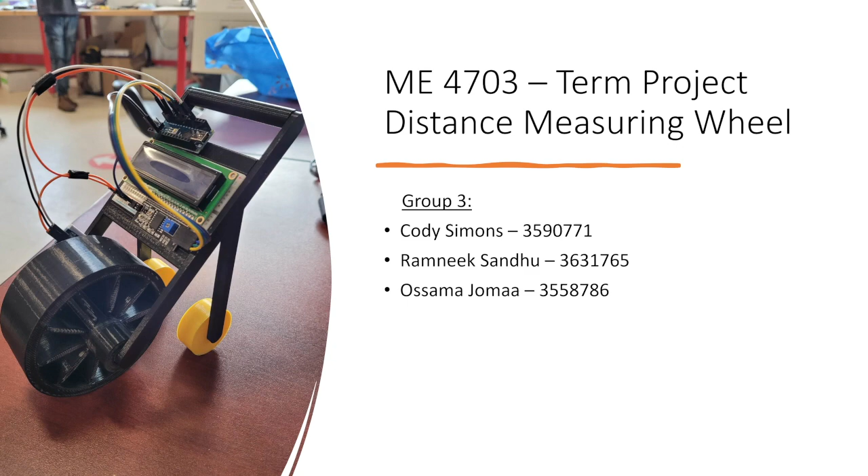Our agenda for this presentation will go as follows. First, I'm going to start off with the introduction, different iterations of the design, and briefly talk about our final design. Then Ramneek will continue on going more in depth on our final design, talking about the components involved and the circuit diagram. Finally, Cody will talk about our testing procedure, results and analysis of our design.

The main objective was to ensure that this handheld instrumentation is able to measure longer distances unlike a ruler stick, and also has the capability to measure curved surfaces unlike a measuring tape.

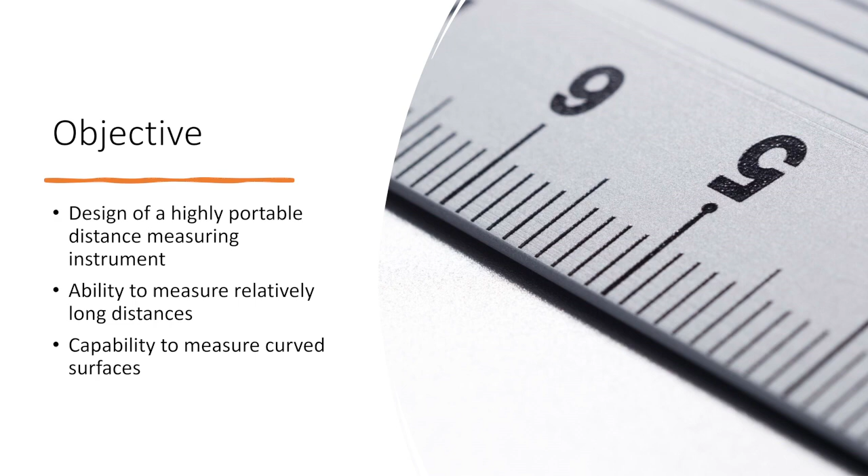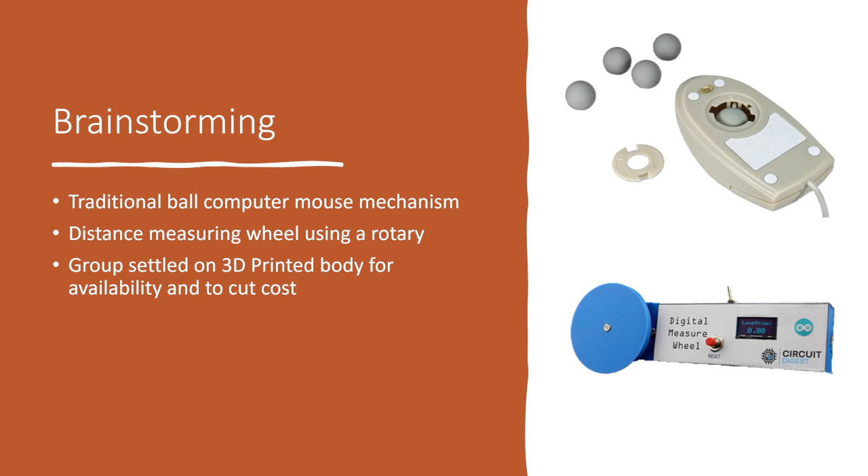The group brainstormed many ideas, like using a traditional ball computer mouse mechanism, but to read distance instead of moving a cursor on a computer screen. Another idea was a distance measuring wheel using a rotary encoder, as can be seen in the picture slide. The group finally settled to 3D print the body and use an external sensing device to cut cost, and simply because it was what was most easily available.

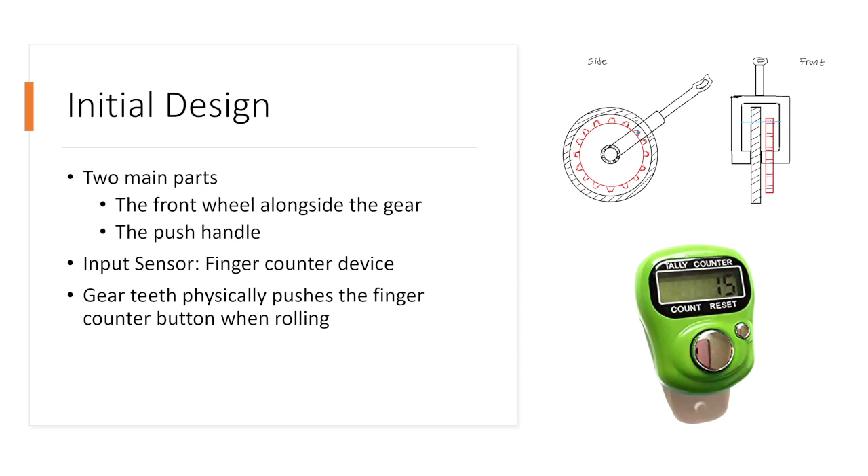The basic concept of our initial design is a rotating wheel attached to a gear with a push handle. The gear teeth are meant to push on a finger counter device to track count of every gear tooth pass. The more the teeth, the more accurate the reading would be. So the group had to figure out a happy balance between increasing the number of teeth while giving clearance for the input button to be released after being pressed.

For our initial design, the group 3D printed the blue wheel as a first draft prototype. Several quality of life tweaks have been added to the second design, like an extra front wheel for better system stability, and two rear wheels to make sure the sensor attached to the push handle stays in position relative to the rotating wheel for a more accurate reading. Finally, a cage was added to the top to house the finger counter reader.

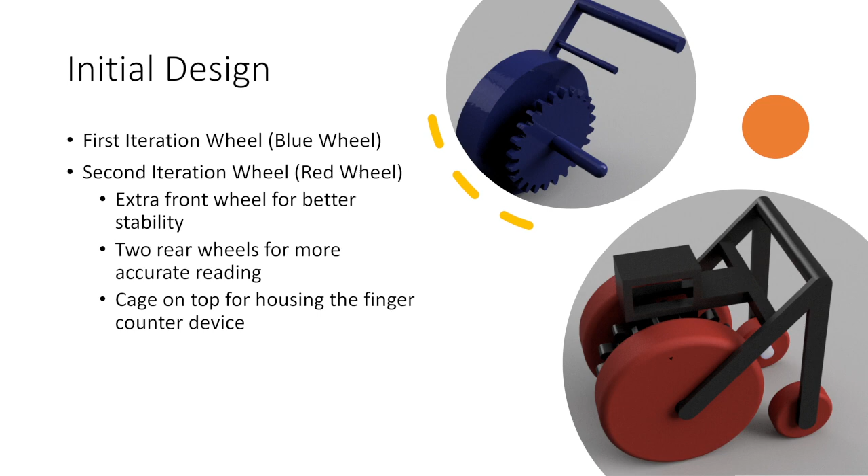For our final design, the group had to change the sensor input from finger counter reader to an IR sensor due to supply chain issues. This ended up working better for us since it gave us more control over the system code. For example, we can now have different length unit readings. The way this works is the IR transmitter emits a beam of IR radiation which travels through the air until it hits an object. In this case, it would be the fins in the newly designed wheel.

Also, for the final design, the gear and the finger counter cage has been naturally eliminated, as can be seen on screen.

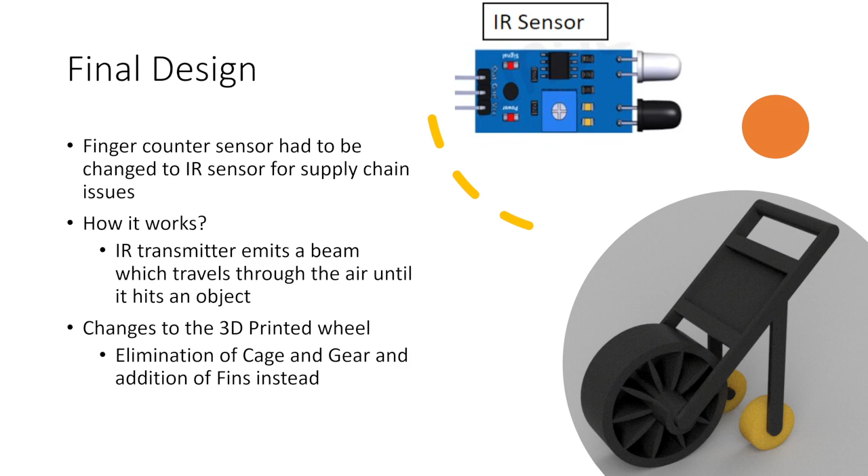Let's now discuss the working principles of our final design. The design is developed using an IR obstacle detection sensor. It converts number of turns into linear distance traveled by the wheel. The sensor's IR transmitter emits a transmitted IR beam and upon detecting an object or obstruction, reflects the beam back to the IR receiver. In our design, the IR sensor detects the various fins of the wheel. The code counts the number of fins that have passed the sensor and converts it into linear length. The linear distance L is the number of fins N times the arc length l. The total length is calculated and displayed for the user.

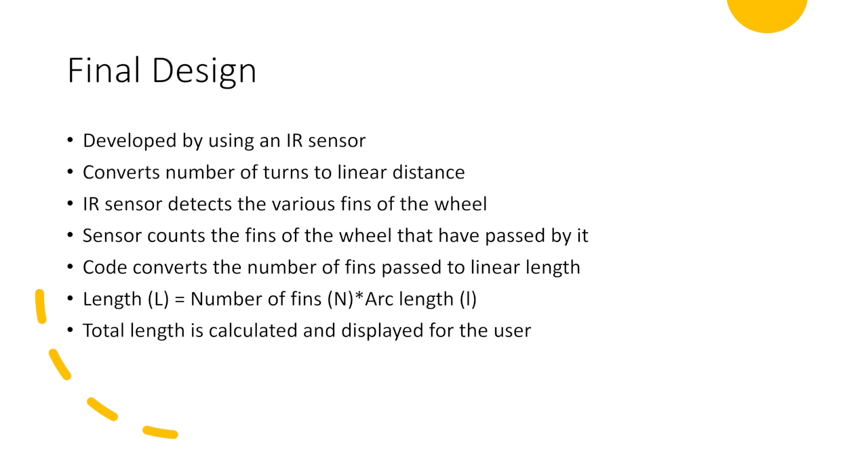The design consists of the following components: a rotating wheel, an IR sensor module, an Arduino Nano microcontroller, a 16 by 2 LCD display, an I2C 1602 serial LCD module, a breadboard, and jumper wires.

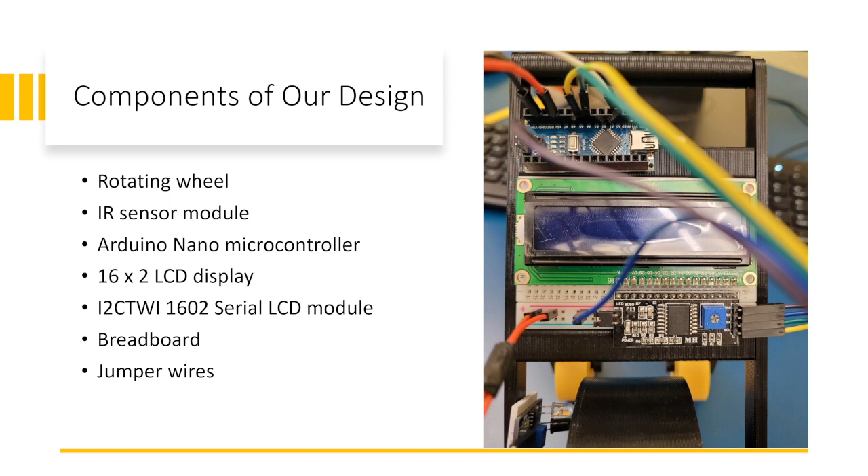The following schematic depicts the circuit diagram for our distance wheel. The wires in green are the grounded connections, and the ones in red are the power supply for the sensor, display units, and the Arduino. As a fin passes the IR sensor bulbs, the microcontroller counts it as a unit input and multiplies the arc length between the two fins to display a linear distance value.

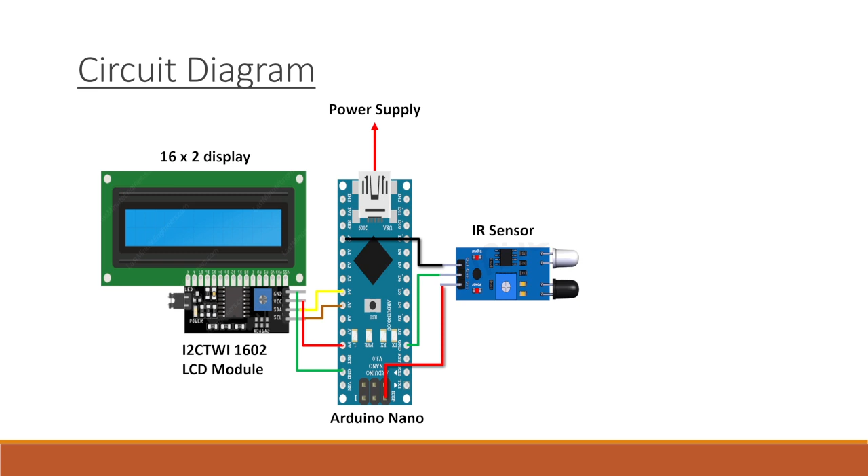The final prototype of our design is as shown. It consists of a handlebar for the user to grab the measuring wheel. The sensor is placed between the fins, and as the user rolls the wheel, the distance traveled is displayed on the LCD screen. Currently, the Arduino requires a cable connection to a power bank or a computer. In future iterations, the design could be hooked with a 9-volt battery supply to make the wheel cordless.

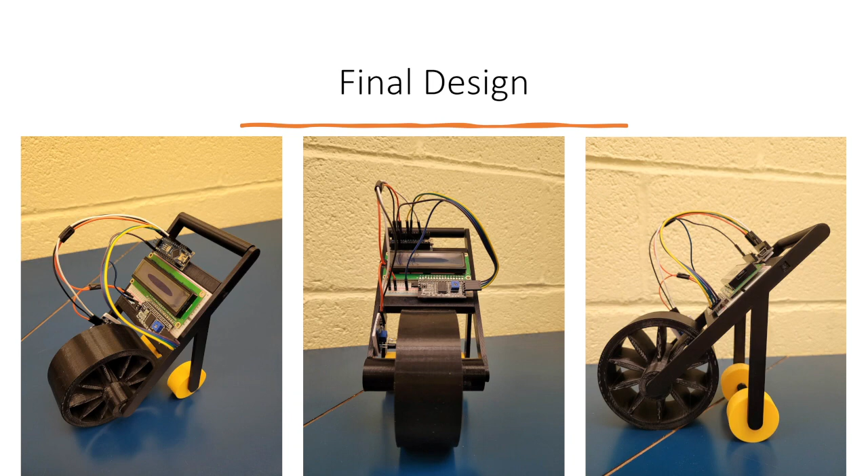Now I will discuss the testing procedure done in order to yield the results obtained from our IR sensor prototype.

For the testing procedure, we decided to measure 3 table surfaces in the library: a table in the fabrication lab, a small side table, and a square table in room 105.

Each dimension of each table was measured beforehand using a tape measure, where the length and width were measured 4 times each and then averaged. This gave us an insight as to what each dimension would be when measured with our sensor prototype.

When using our distance measuring prototype, a line marker was established between 2 of the fins so that the IR sensor passed through the first fin as it was counted. This acted as a reference position where the prototype started each time it measured a table dimension, always positioned so the point was in perpendicular contact with the surface.

When measuring each table, there were 2 trial tests performed, one for the length and one for the width, with 20 samples in each trial. With each sample measured and recorded, the time taken for each sample was also recorded. When all the data was collected for each dimension, an average was taken.

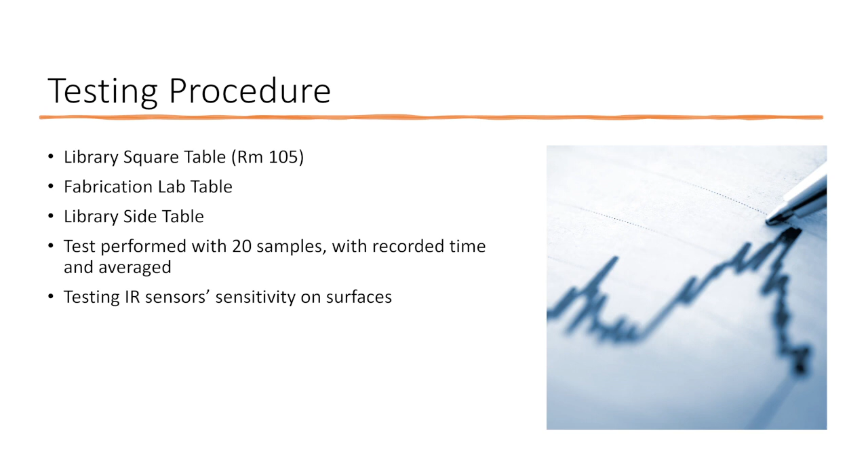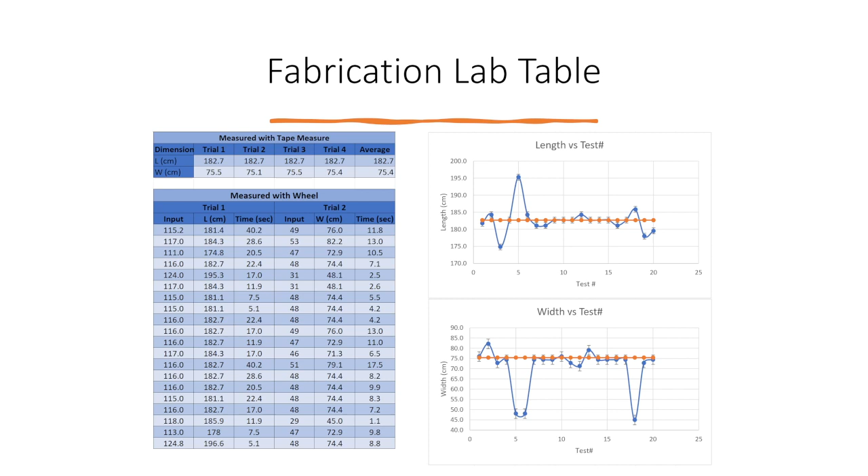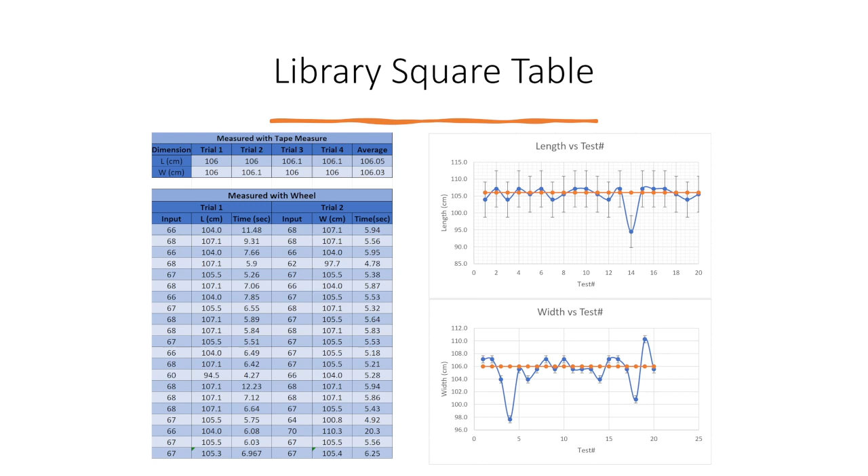This next set of results shows the data obtained from measuring the library square table, which was 106 by 106 centimeters. As you can see, the data obtained for the length is very close to its actual length, as well as for its width. Any outliers below the orange line in both graphs are from when we moved the sensor too fast, and any above it are from when it was moved too slow.

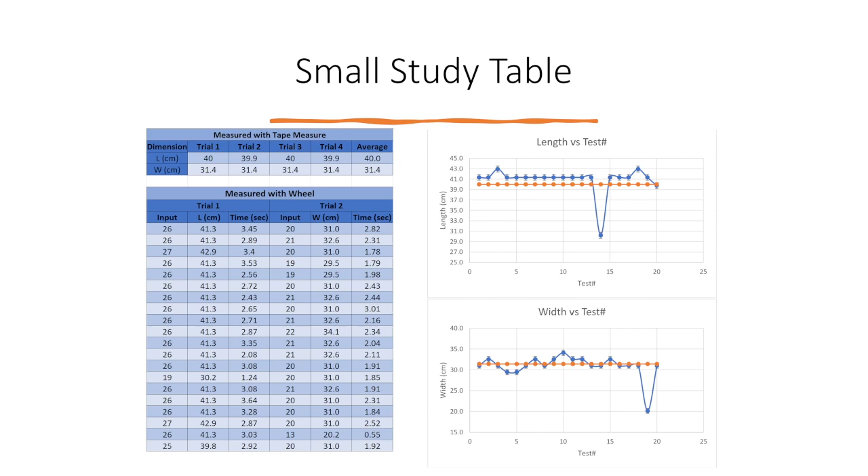Finally, these results show the data obtained from measuring the small study table, which was 40 centimeters long by 31.4 centimeters wide. This data is consistent with its actual length. The measured length isn't exact because the IR sensor cannot read half of a fin, as shown in the first graph above. Any outliers in both graphs are from when the sensor was moved too fast in measuring the surface.

There is some error associated with the sensor prototype as it is used to measure distance. Firstly, there is human error from the user: if the wheel is not moved in a straight line, it can generate a measurement error. To mitigate this lateral movement, the device should be moved carefully along a straight path. Also, there could be slippage between the wheel and the measuring surface, which can be mitigated by wrapping rubber bands over the wheels.

As mentioned previously, moving the prototype too fast can also disturb the IR sensor and cause inaccuracy in measurements, so moving the wheel at a reasonable speed is recommended. Finally, there could also be reset position error, which can be mitigated by using an automatic reset button in future iterations. Surface roughness also plays a role in error and can be accounted for by adding or subtracting an uncertainty value.

Let's now take a look at a video to demonstrate the working of our prototype.

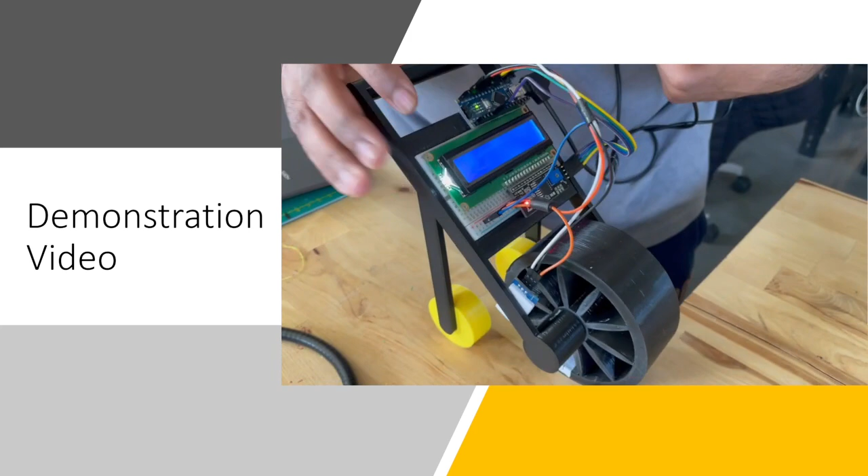To wrap things up, we have successfully completed our project scope of creating a distance measuring instrument. In our future steps, we will quantify our errors and generate a plus or minus uncertainty value. We also plan on measuring another table, a curved surface, and a carpeted floor, and finally we plan to complete the report that would act as a manual for the prototype.